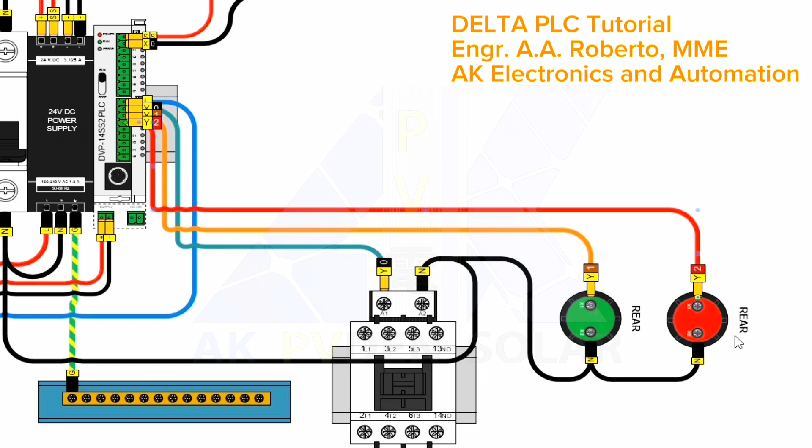So, again, to create a new program, let's click this icon, New. And then the project name will be Single Push Button. Okay, still our controller type is DVP and our PLC type is SS2. So just click OK.

So, on the left side ng ating screen, click lang po natin yung Programs, right click, and click New. Still, ladder diagram yung gagamitin natin. Click OK.